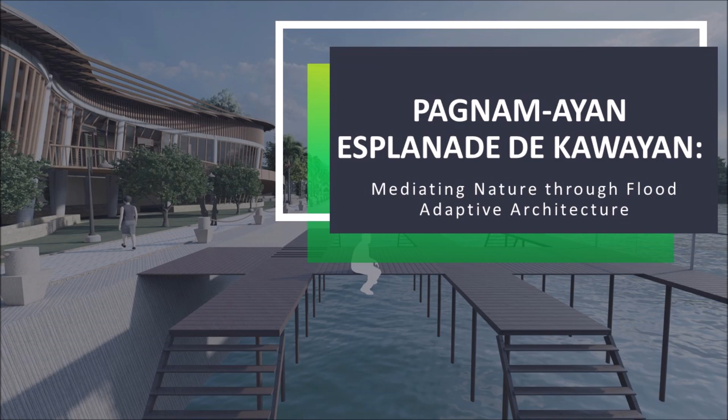Today I am here to present to you my project titled Pagnam-Mayan Esplanada de Kawayan, Mediating Nature Through Flood Adaptive Architecture.

A man will always go back to nature. Leisure and recreational activities are part of our daily lifestyle. It is a way to escape the tiring negativities in life, as well as it gives positive benefits to our health. But the lack of open spaces, greeneries, or parks in some urban areas has diminished the right of everyone to spend their leisure time. It is also a way of socialization to unite diverse classes of people.

The project Pagnam-Mayan Esplanada de Kawayan, Mediating Nature Through Flood Adaptive Architecture, is a recreational strip composed of a community center, restaurant, fish market, and a promenade. It provides recreational and economic activity to the community.

Esplanade reserves, esplanade strips, and access strips, collectively referred to as esplanade areas, are in this note a statutory mechanism to protect riparian and coastal margins. Riparian margins are strips of land identified along the edges of natural watercourses, including streams, lakes, and wetlands. The protection of the margin helps conserve environmental values and provides opportunities for public access and recreational use as provided by the Resource Management Act 1991.

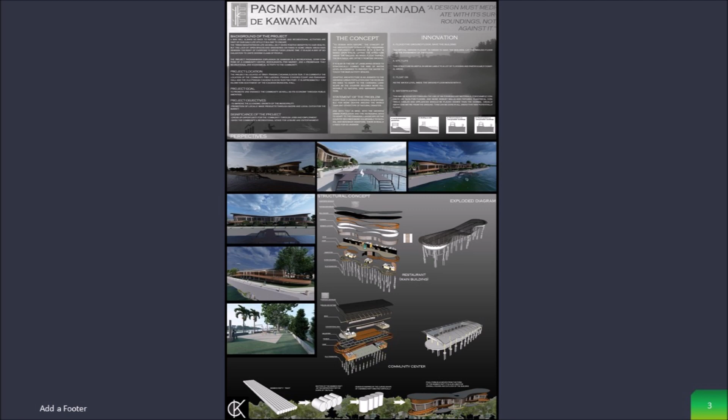Site analysis. The project will be located on a strip of land along Quirino Boulevard, adjacent to the Mestizo River in Barangay Pandan, Caoayan, Ilocos Sur. Currently existing within the site are the Barangay Hall and Covered Court of Pandan, a community fish landing, the Rosangis Culture Production, and the Old Pandan Ilocos Sur Fish Port.

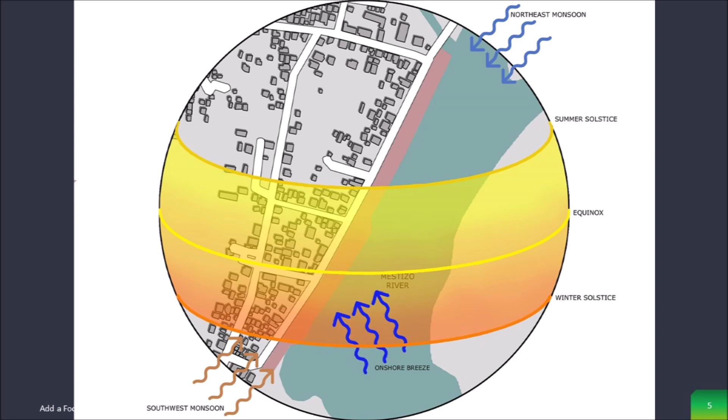At the northern part of the site, there are informal settlers. The existing structures will be redeveloped and the informal settlers will be relocated. First, we have the sun path and the monsoon winds that can be harnessed as a natural coolant for the project. Also, the site and the existing trees.

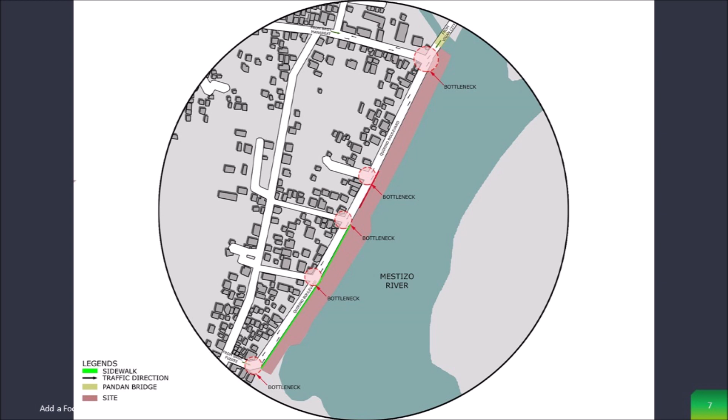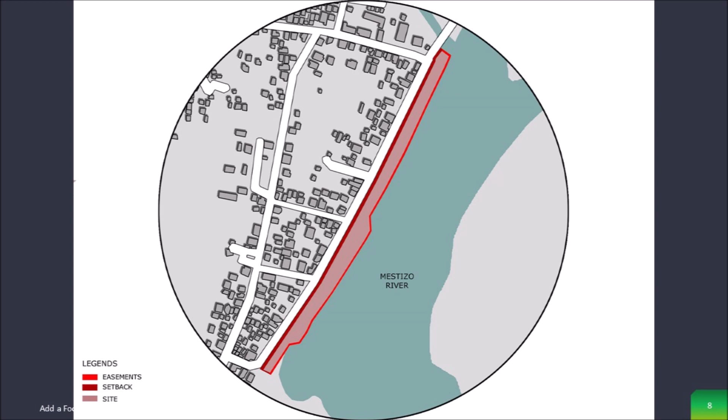The Site Development Plan. In the Site Development Plan, the site is divided into 3 areas: the public, the semi-public, and the private area, whereas the whole eastern face of the site is bounded by the long boardwalk from end to end. The northern part of the site is where the public park is located.

It has different amenities from multi-purpose courts, parking areas, picnic grounds, and public playgrounds. In the middle part of the site is the location of a community center, amphitheater, a restaurant, and a powerhouse. On the southern part of the restaurant is the wet market with a Rosangis culture production and fish landing.

Beside it is a 14-slot parking area. At the most southern part is the location of the maintenance building that also serves as a material recovery facility, with a water tower beside it. Adjacent to the restaurant is a boat ride dock that also serves as a fishing dock.

Floor plans. Here is the main building.

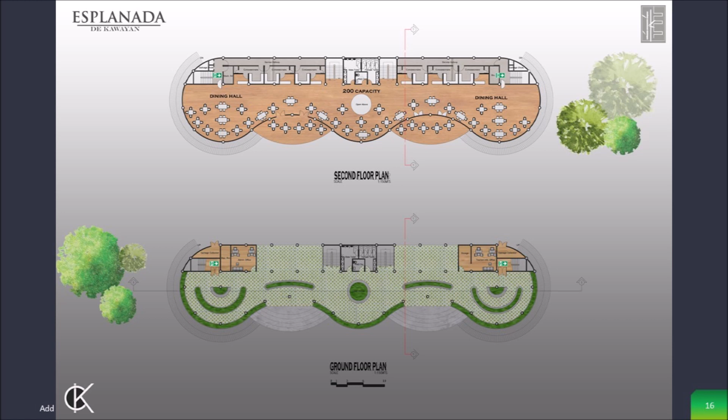As you enter, the first thing you'll notice is the absence of a ground floor. The left side of the ground floor only consists of an admin office and an electrical room. The right side has the tourism office with the fire exit and garbage collecting room at either end of the building, while the toilets and main stairs are located at the center, all the way up to the second floor.

Elevations of the main building. The elevation features a facade that is naturally looking, with resemblance to a bahay kubo, not only through its facade, but also through the use of stilts.

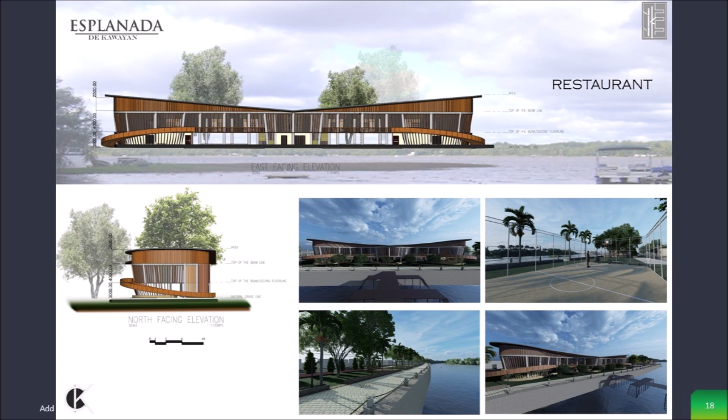The active areas are all above the ground floor, which is one of many features of adaptive architecture. By elevating the main building, the space below will allow water to flow under the building, making it hard to reach by flood. It may be flooded, but damages will be minimal because of the stilts feature.

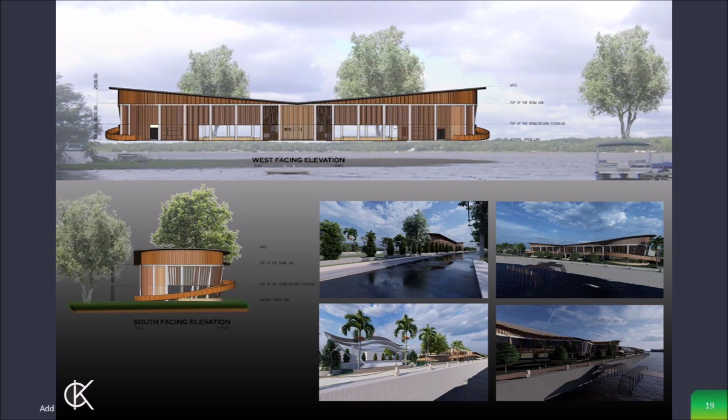A front and center sloping roof is featured so that water flows towards the water collection tank below, and also forward to return the water to the river. All throughout, the facade is covered with treated bamboo panels.

Section of the main building. The section shows how passive cooling is presented through the use of glass louvers with bamboo frames. It can be tilted at an angle that lets breeze from the river enter and cool the entire dining hall, making air conditioning unnecessary.

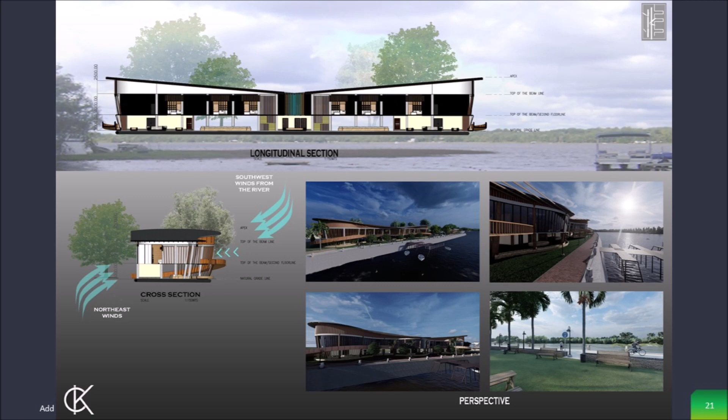Bay section. The first blow-up detail illustrates the connection of the purlin and rafters for the roof. The next blow-up detail shows the connection of beams to the roof. The third one presents the connection of the upper part and lower part of the louvers to the building structure.

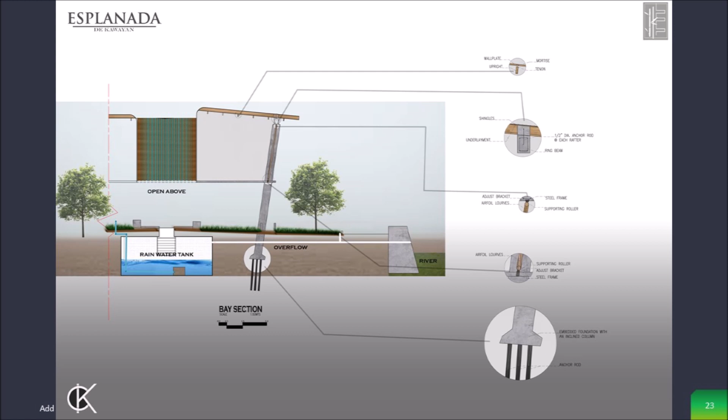Lastly, the final detail shows the foundation of the structure with the pile foundation and stilted column presented. Structural concept: the overall structure of the building uses conventional construction. Here we have stilted columns supported by pile foundation with wood rafters and purlins as the roofing system for the shed-type roof.

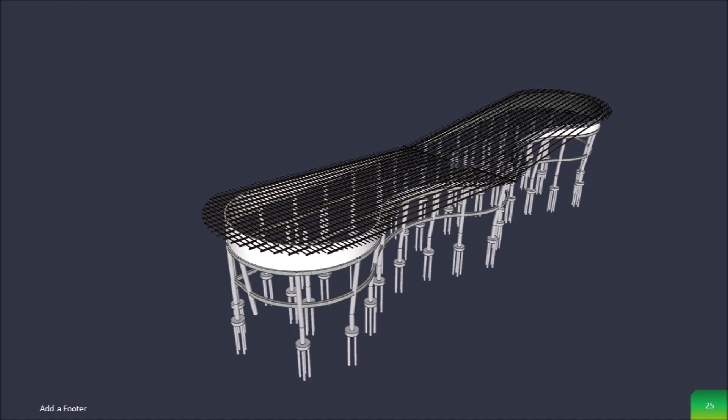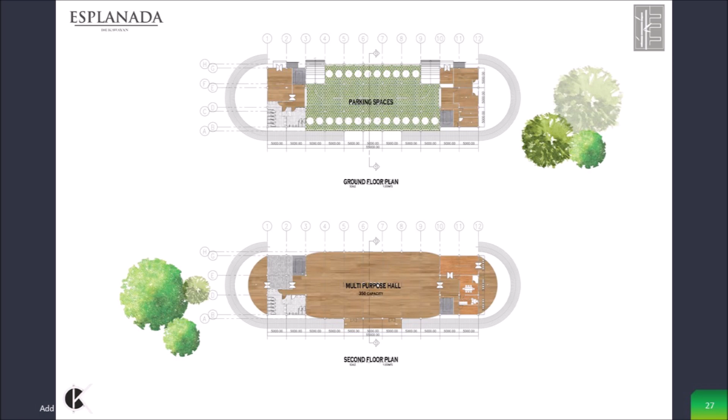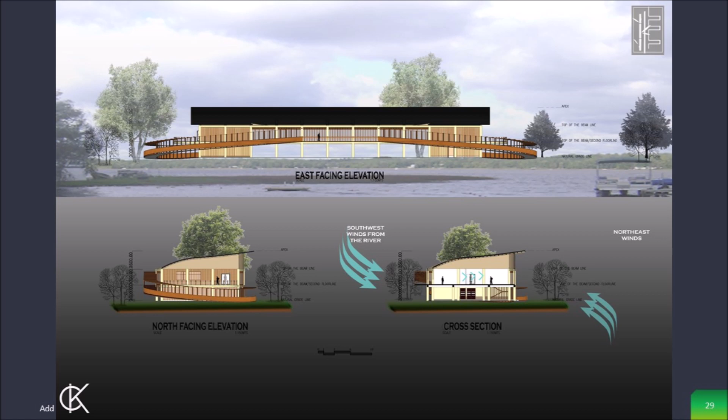The other two sides of the building have the view decks that face the park, while the other faces the amphitheater at the other end, with giant ramps that also serve as view decks that give a 180-degree full view of the river.

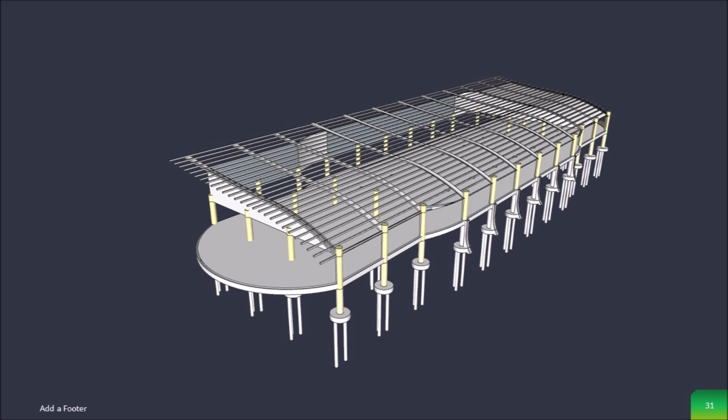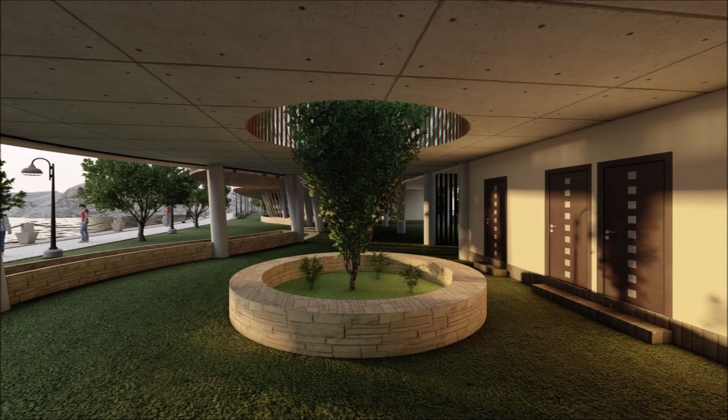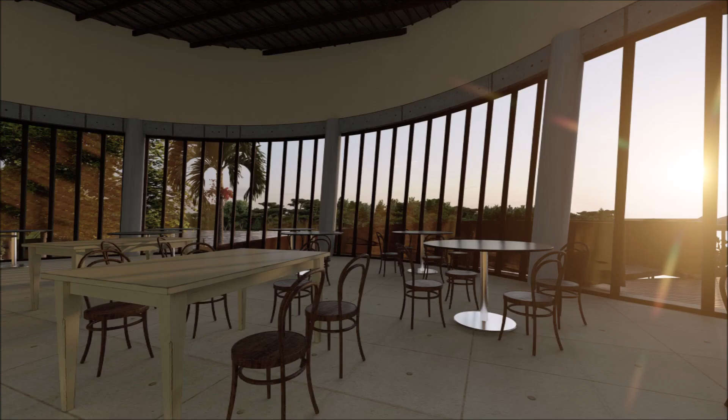Additional exterior and interior perspective of the secondary building.